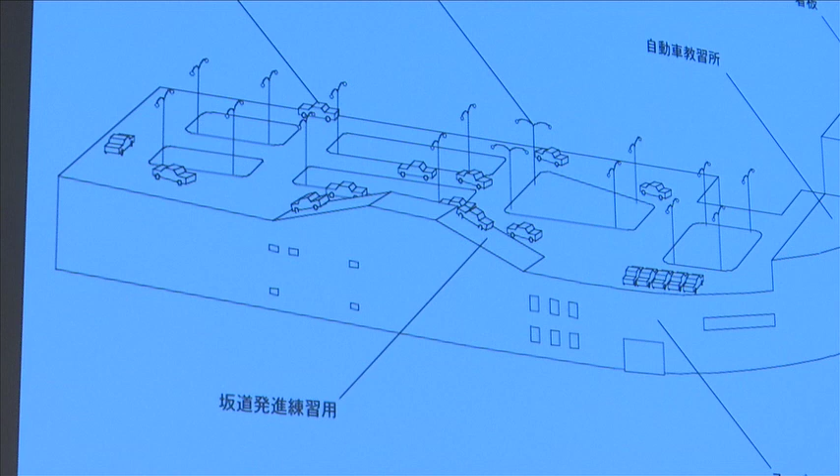So I'll go quickly. This is a super car school—a supermarket and car school on the rooftop of it. There's nothing to do with each other. This type of drawing was invented at that time—it's caricaturized, simple line, with certain depictions of important elements. We pick them out with these lines to explain small things, and how these create an ecology of different things in one physical entity as a building, which is strange and very surprising.

So the supermarket and the driver's car school—they have no business with each other, nothing to do with each other. But since in Tokyo the ground surface is quite precious, this kind of strange hybrid can happen. This is the department store—the highway department store.

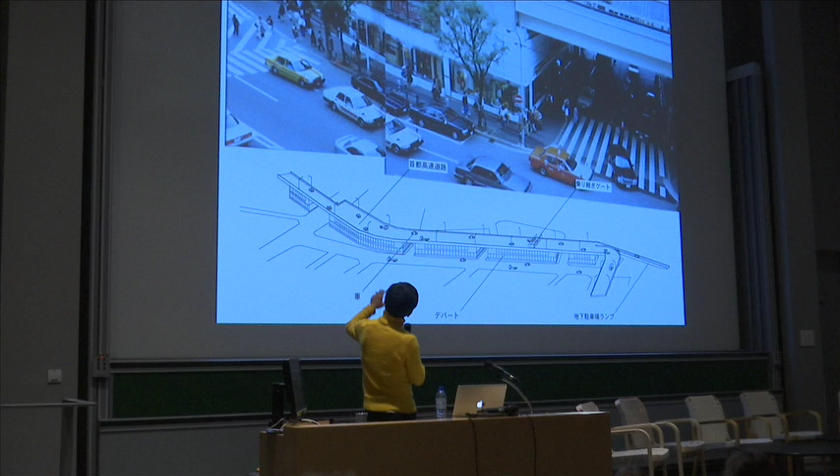It's the elevated highway running through Ginza. Ginza is the most distinctive, exclusive commercial area, like the Champs-Élysées, but we have a highway running through it. So in order to negotiate this commercial district with the highway structure, the ground level and first level under the highway—which is actually a byproduct of the construction of the highway—are occupied by shops and become a shopping mall. People on the sidewalk are walking 4 kilometers per hour, watching show windows, but on the roof, the car is driving at 100 kilometers per hour. So two different speeds are encountering in one building.

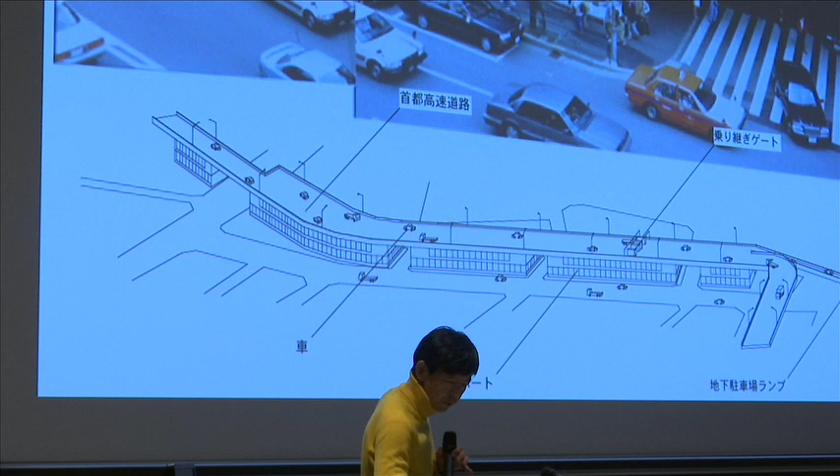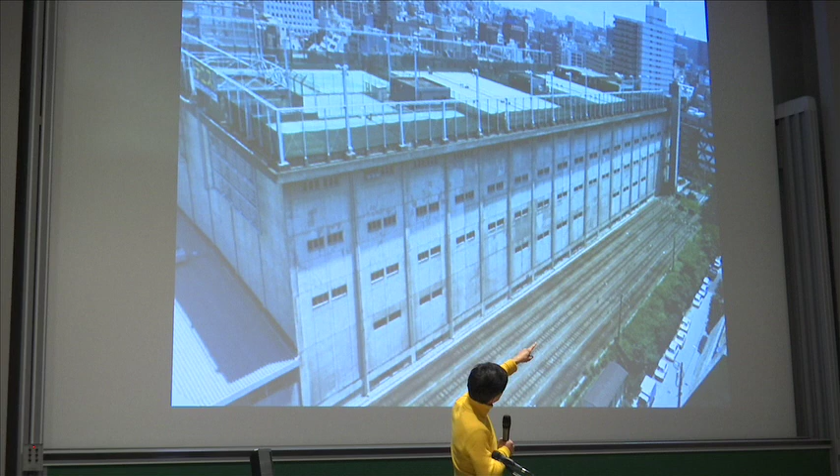Yes, it's a very silly drawing. This is a very simple building—a warehouse for paper without any attraction. On the rooftop, it produced a huge empty space, so the owner started a tennis court on top of it, adding a very tiny, small element connecting the ground level and the rooftop as the elevator. This elevator is the only access point to the rooftop for tennis.

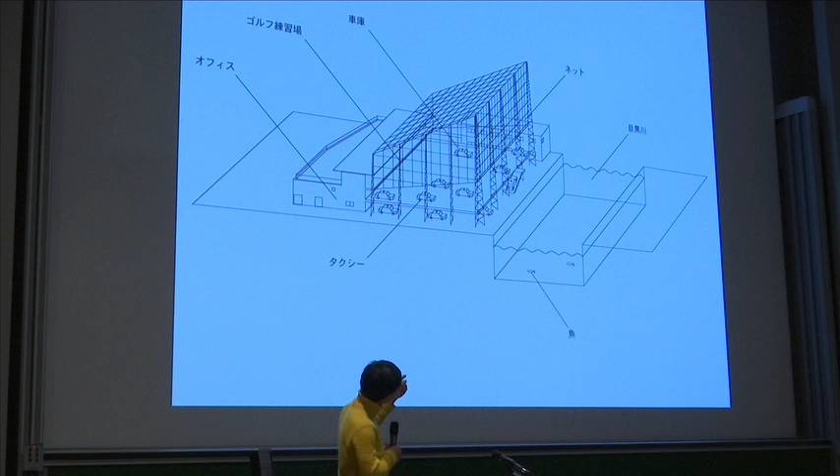Yes, this is destroyed now, so this document is quite meaningful. This is the golf taxi building. In Tokyo you can find this kind of envelope made of net for practicing golf, and this envelope always produces empty space underneath. In this case, a taxi company occupies that empty space for parking.

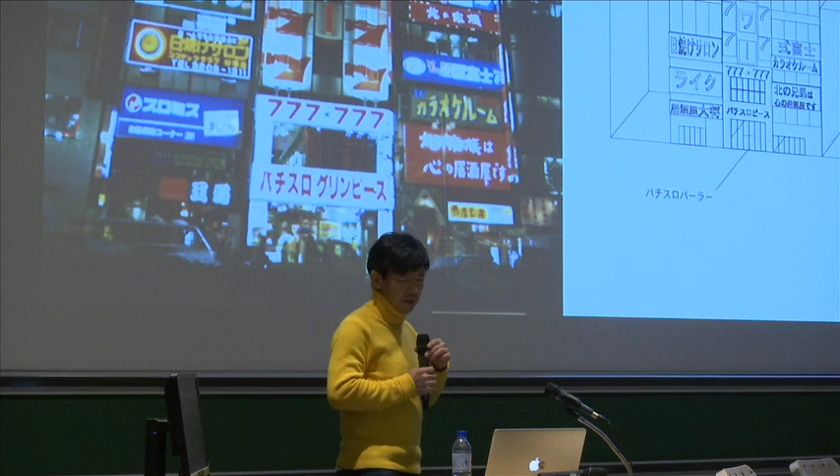You know Shark Bank, you can borrow money but with very high interest. Then you spend money here in the central building for gambling. So I imagine someone who has trouble with gambling goes to this shark bank to borrow money, spends money here, and then borrows money here again. So this dark side of urban ecology is also packaged in the form of Notre Dame. This is the kind of conclusion we drew from observing these buildings.

At first we tried to establish a typology of those hybrid buildings, but I realized it's impossible, because typology is achieved through a process of reduction - you try to find similarity between different cases, comparing them to find similarity within differences, and then establish typology. But those examples are all different, and there's another type of structure which produces this kind of variety and diversity. So I changed my mind, and realized it's better to describe it in this manner.

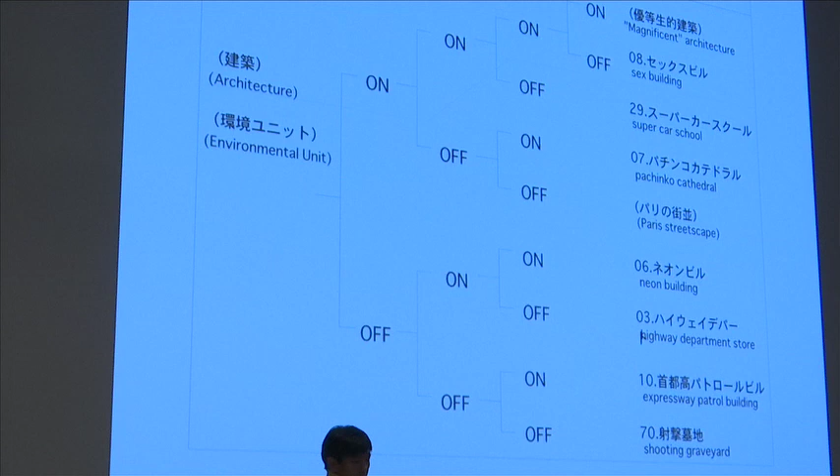There are 3 main orders for designing and planning architecture. The first is category - architecture is architecture, civil engineering is civil engineering. There are many examples which are a hybrid between architecture and civil engineering structure. But in the case of Made in Tokyo, this kind of category is dissolved, so it's off.

Structure-wise, modern architecture disciplines say that a building should have its own complete, autonomous, independent structure. But in many cases, they just borrow existing structures, and one function ends up bridging 2-3 different structures. So in this case, structure is also cancelled - structural order can be cancelled too.

So off is introduced, and then use-wise - for example, this department store, like a supermarket, has on its rooftop a driving school. It's almost a nonsense combination. So use-wise, we can also say there's no meaningful combination between different programs. So use can be off as well.

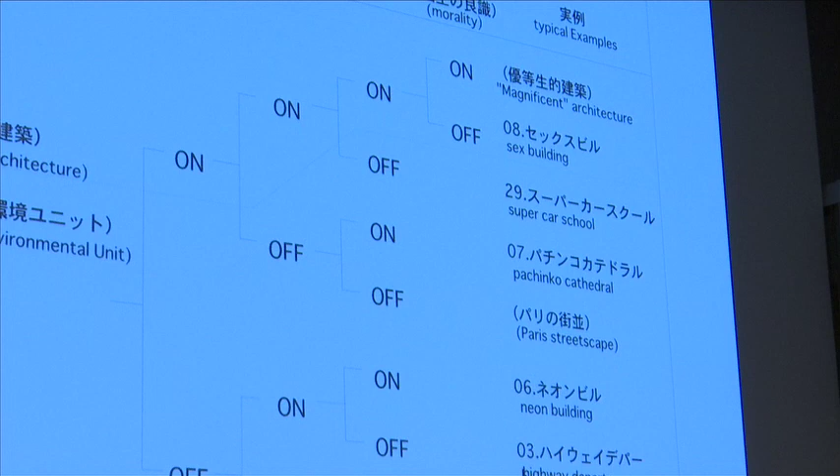If you only allow these to match with this kind of order, if you can only take one side, there's only one way to solve the problem. This is the canon of modern architecture, modernism in a very narrow sense - modernism is wonderful, I use it in a narrow sense here. But the examples of Made in Tokyo all introduce this 'off' moment of these orders, so 2 by 2 by 2, 8 different types, 8 different manners to solve the problem. This is a basic structure which can produce so many differences and diversify the space of Tokyo.

Now, the Pet Architecture Guidebook - more funny examples. This is Brasserie Rouen, a one-man brasserie, 1.2 meters wide and 8 meters long. There's no corridor space inside the restaurant, only a counter, and one chef does everything. In order to go to the bathroom, you have to go out from the restaurant.

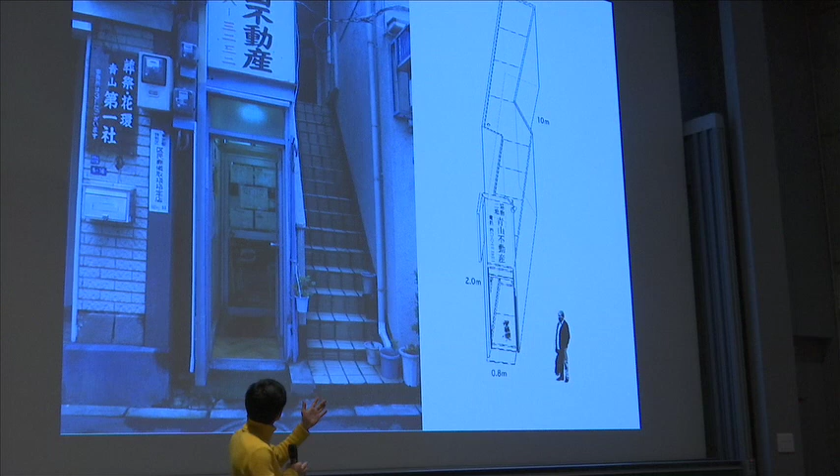This is Aoyama Real Estate Company, which sells information about real estate, apartments and empty houses. It starts from 80 centimeters and is 10 meters long. But this long wall works quite well to pin up information about apartments.

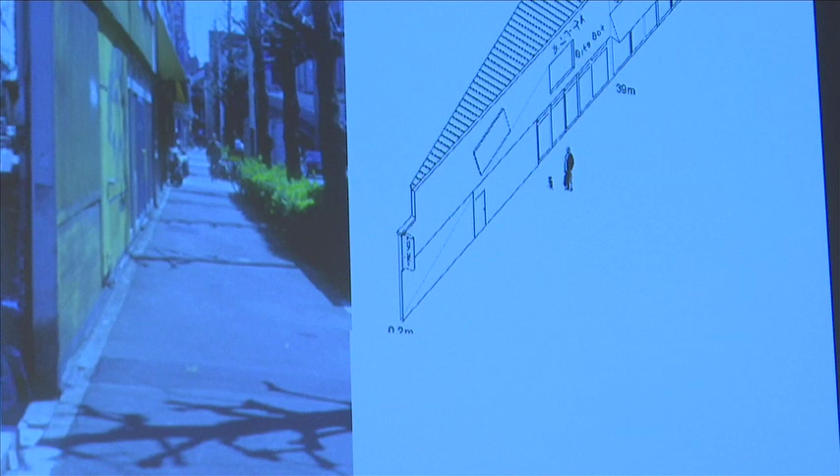This is Bike Box in Ikebukuro - an extremely keen triangle shape, run by a bike shop. He exhibits bikes from 50cc to 1200cc, small to large, according to the depth of the building. And this is a kind of mother-and-kid typology of pet architecture.

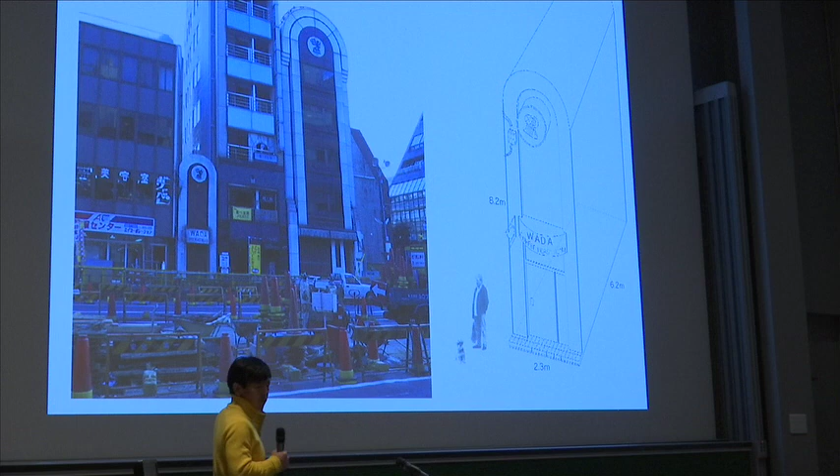This is a coffee shop - a cafe, with the upper level being the house of the owner. But since roasting makes a very strong smell, they made a roasting room separately, using the gap space between buildings as an independent facility.

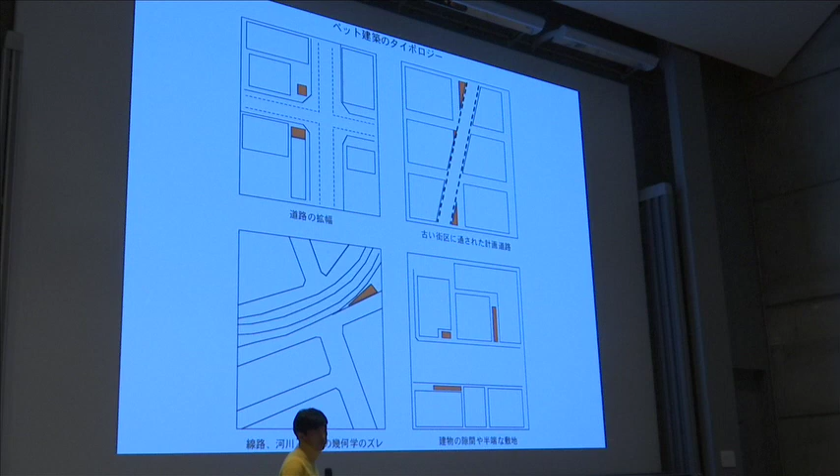And then, in the case of pet architecture, we can actually establish typology, because it's produced by the transformation of the city, street patterns, and urban fabric. So there are four main typologies.

One is produced by the enlargement of the street, and then the corner side becomes very small.

The second one is a kind of introduction of two different geometries, like this. The river and the railway track want to curve gently, but the street wants to be perpendicular. So there is always leftover space between the two geometries.

And then if a new big road is introduced, planned into the old city fabric, there is always this kind of leftover space along the main street, the new street.

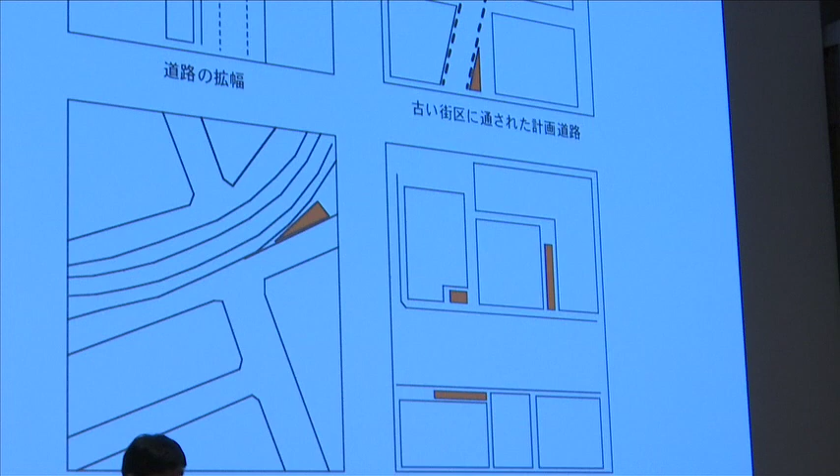And then in Japan, buildings don't share a wall with neighbors. We don't have a mur mitoyen. So there is a chance to insert a tiny little building between buildings.

So those four are the typology. Then I shift into another study called Void Metabolism, and it's about this nature of Tokyo's urban fabric.

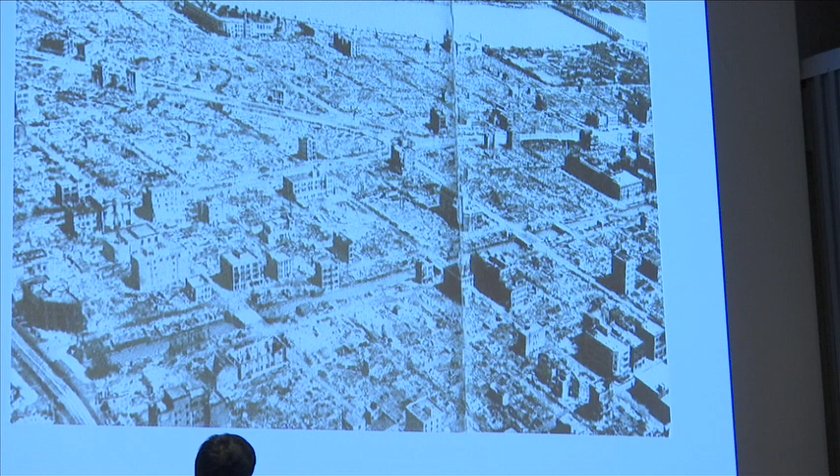So starting from this photo, it's Tokyo in 1945, just after the bombardment by Allied forces, and 70% of the surface of Tokyo was burnt out.

And then the Japanese government, during the post-war period until '52 when the San Francisco agreement was signed, was under the control of Allied forces, so we couldn't make a big urban plan, and we couldn't establish a new big budget for making fireproof concrete social housing.

So it's quite difficult to manage the reconstruction of the city. The only policy the Japanese government could pursue was asking people to build their own houses by themselves.

And then in order to encourage people, the Japanese government established a very low interest house mortgage plan, under the condition that the design should be done by an architect. So if the design was done by architects and signed by architects, this family could receive this very low interest house mortgage plan.

So this really encouraged architects to be involved in single family house design. This is why Japanese architects design so many houses—this strong tradition today was actually established through this process of recovery from World War II.

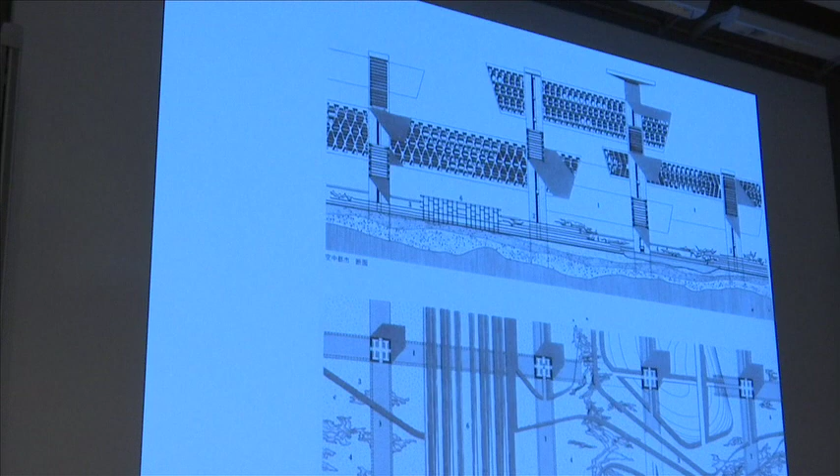So this core is called the urban core, designed to receive the accumulating population demographic flux from all over Japan into Tokyo, and then create a kind of city in the air. This is a very visionary plan by the Metabolists.

And then other younger architects like Kikutake, Maki, and Kurokawa all tried to propose the same model of core and capsules around it, though very few buildings were actually built. This is one of the most monumental buildings from that period.

Nakagin Capsule Tower still exists in Tokyo, which clearly shows how architects at that time imagined urban creation as a tunnel core which receives the flux of the population, and the replaceable capsule, which is a kind of tentative solution for people to live there. But actually, this building is now very deteriorated because the sewage pipe runs through the different capsules.

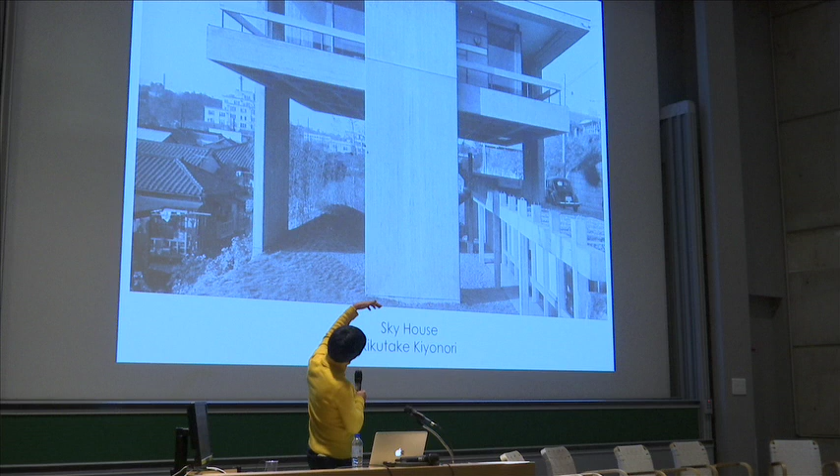So capsule is actually not replaceable. If you take one capsule, you destroy the connection of the sewage pipe. The same idea of metabolism was also introduced for this type of single-family house. This is Kikutake's own house, Sky House, dedicated for a young couple, he and his wife. The house has just one room, and the kids' space should be suspended from this artificial plane, which is supported by a concrete wall column.

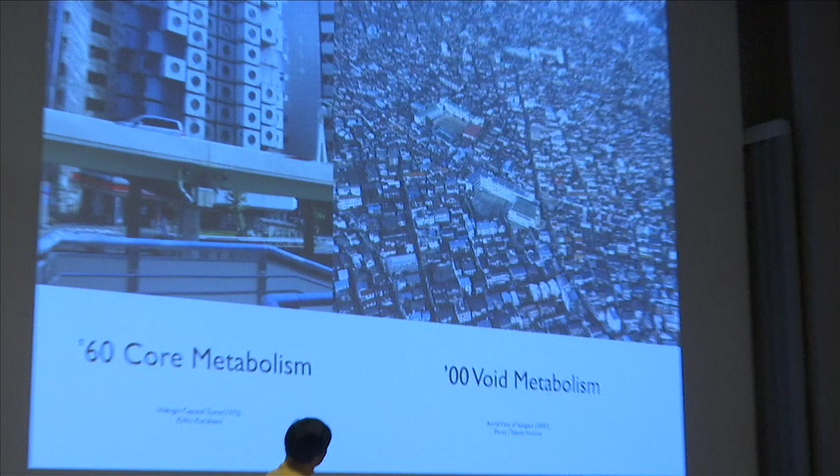And this also clearly shows the idea of metabolism. But actually, what was happening after World War II was this phenomena of repetition of houses over the ground of Tokyo. If this is also metabolism, because all these small grains of houses in the apartment are basically regenerated every 30 years, since the life average of a Tokyo house is 30 years.

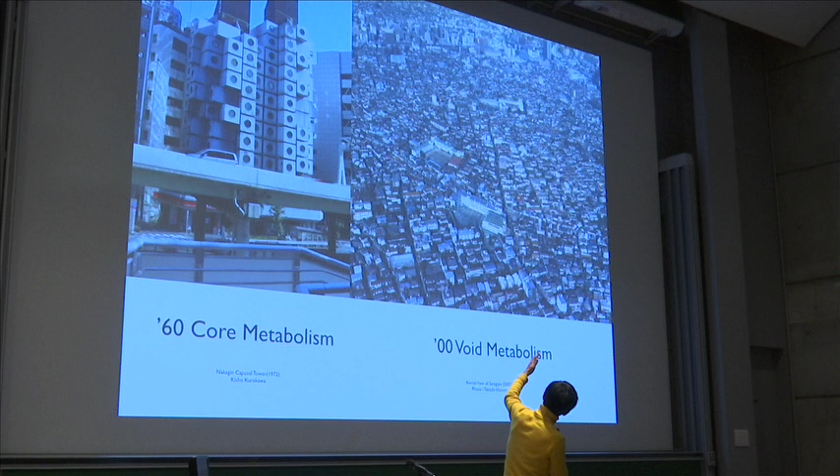But on keeping the void space between buildings, as I mentioned before, there is no idea of mur mitoyen, so there is always a gap between buildings, the void space between buildings. So void is always kept, but the building can be replaced. In this case, the actual void metabolism is a void metabolism, and the 60s metabolism can be considered as core metabolism.

This is a view from the Observatory of the Metropolitan Government, designed by Kenzo Tange in Shinjuku, towards the northwest direction, and you can see the repetition of houses until the foot of the mountain. And this is the actual urban fabric where people are living.

Within this nature of Tokyo, it's not easy to... this is a result of the recovery process from World War II, because the government asked people to build their own houses by themselves. Who can build? Who can start doing it? And within this urban fabric, there are many interesting phenomena.

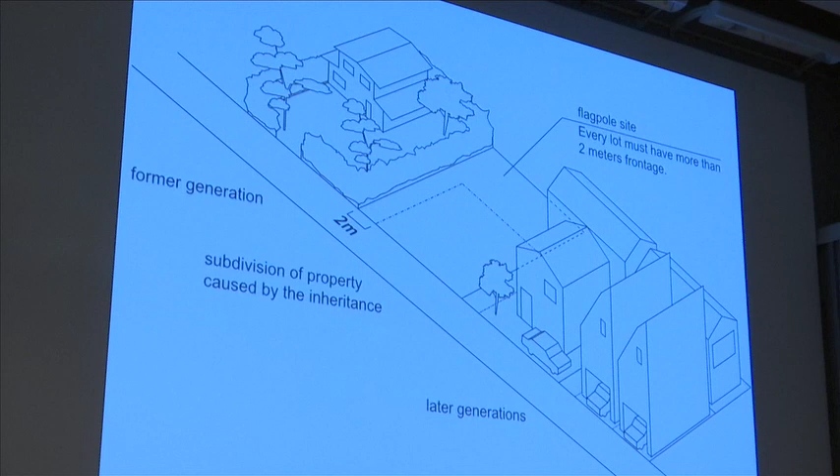One of those is called subdivision, I named it the subdivided suburban. I did a study on the first generation of Tokyo's Okusawa area, which is now swallowed into the urbanized area.

And then we can see many different generations of houses. This area started development in 1920, so it's already 99 years old, and the life average of the house is 30 years. So theoretically, this area has already experienced the regeneration of the building three times. From now on, all the new houses will be considered the 4th generation house. So why is this regeneration happening, and why is it so short?

One of the reasons is there's a very strong inheritance tax policy to redistribute the fortune from one rich family to others. So the inheritance tax is over 50%.

And then the price of land went up extremely high during the 1980s, during the bubble economy. So for example, 250 square meters, which is the initial size of the property of this first generation of suburban development, cost $3 million. And if you are a single child who inherits this property from your parents, you have to pay half the price of this. So you have to pay $1.5 million to receive the 250 square meter property. This is not affordable for a normal employee.

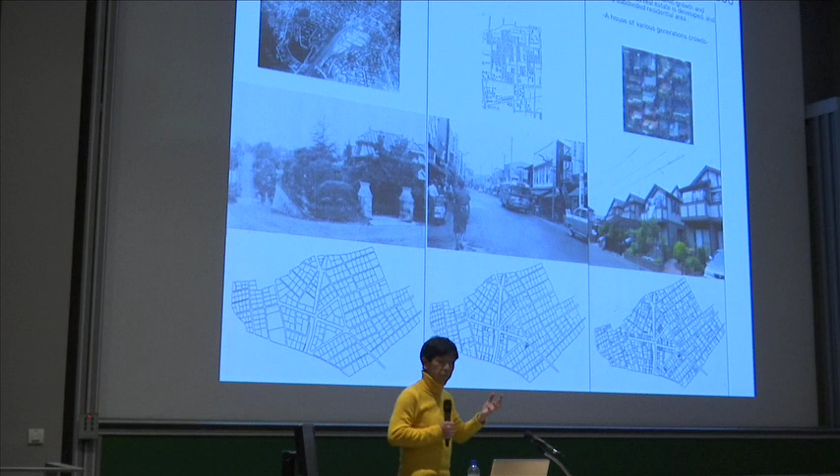So in many cases, they divide the property into small pieces and sell them to pay the tax. This is the kind of mechanism which subdivides the property into small pieces, and the result is like this. Because this is all up to the family, the regeneration is not organized by the municipality, so it's totally up to the individual families. This is how the property is subdivided into small pieces.

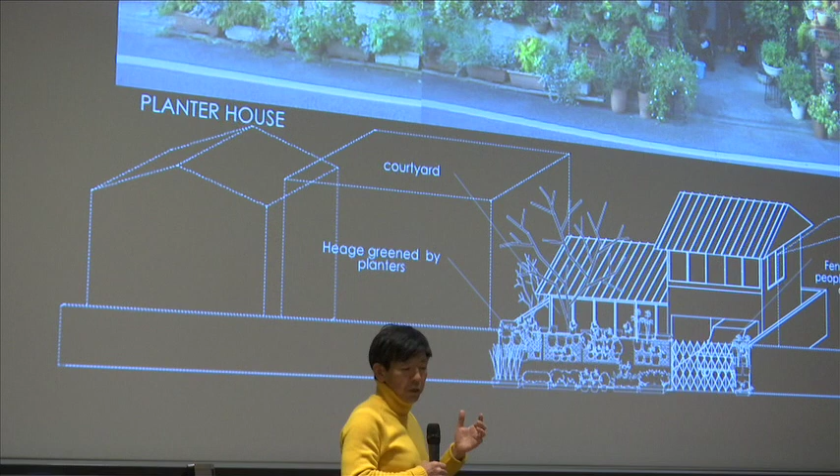Then we can still find the first generation, the original house, which was built in the 1920s, which has a very nice green hedge on the street side, with a big garden, but now the garden has too many grown trees, so the house is not seen so much. And then the second generation, the property became a little smaller, and from this generation people started to own cars, so the garage became an important element, but people still prefer to have greens to create a kind of barrier or buffer from the street.

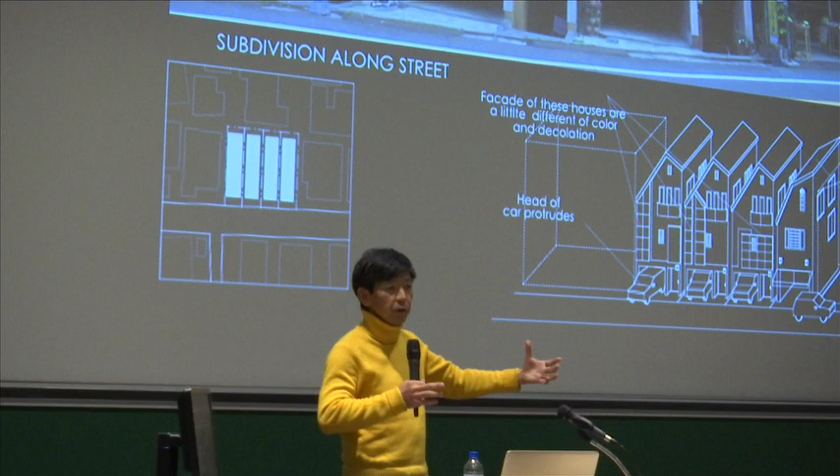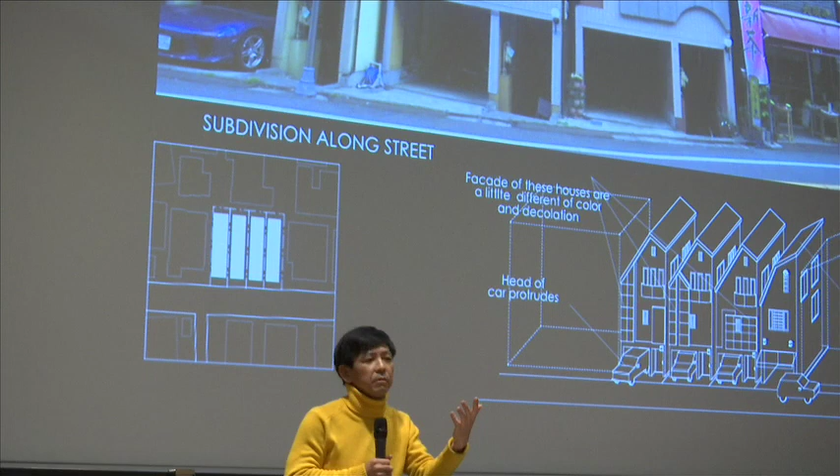But the third generation is like this: the developer bought this big property and divided it into four pieces, building this kind of decorated shed—flavor of lemon, flavor of orange, flavor of strawberry, flavor of chocolate. This is the history of transformation of the single-family detached house in Tokyo.

It's all happening in the same area, so that's why the urban landscape looks so disordered. There's no visual order, but it's because of this timing of regeneration.

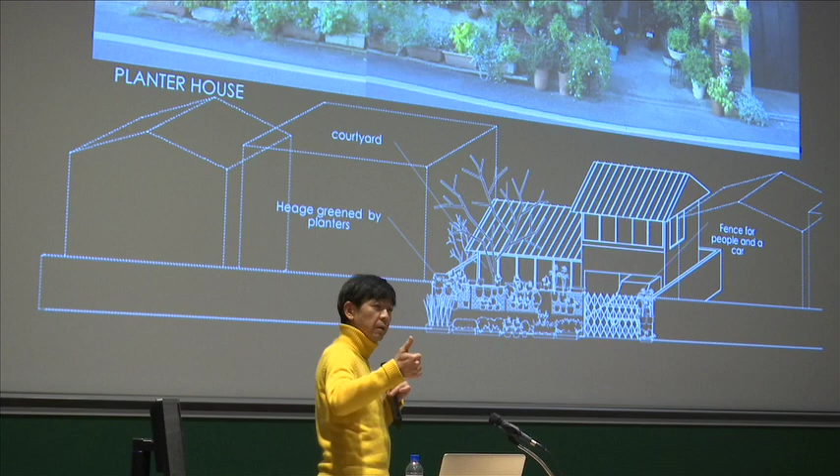In these 70, 90 years, Japanese society has been transformed so much. Construction materials have become very different, and the notion of family, the size of family, also becomes smaller—it becomes a nuclear family. The building law and building code have also changed. So each period, each generation really fixes these different conditions as a background for construction of the house.

So through those different generations, a single family house shows different conditions of society from different periods.

So how should we do as architects? Because we also work a lot on single family houses in Tokyo. In our generation, we are working on the 4th generation.

So I summarize some of the premises shared in the 20th century: the single family house was too pure for the family, too much interiorized by the production of a gap space.

So I tried to change these premises into a space with non-family members, with more opportunity to stay outside of the house, and redefine the gap space in order to produce a more tolerant, generous house.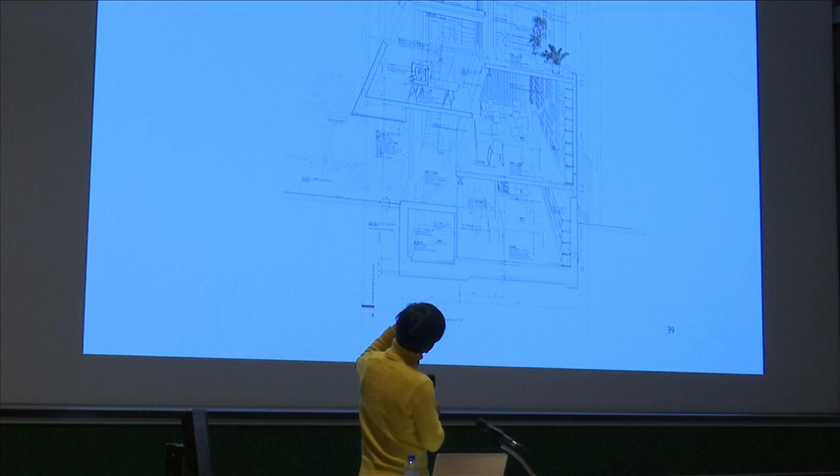This is another drawing I'd like to introduce: a section perspective. It contains detailed information—perspective information, surface information, the grains, and also the behavior of people. So many different things can be drawn before construction, and the behavior actually observed after construction.

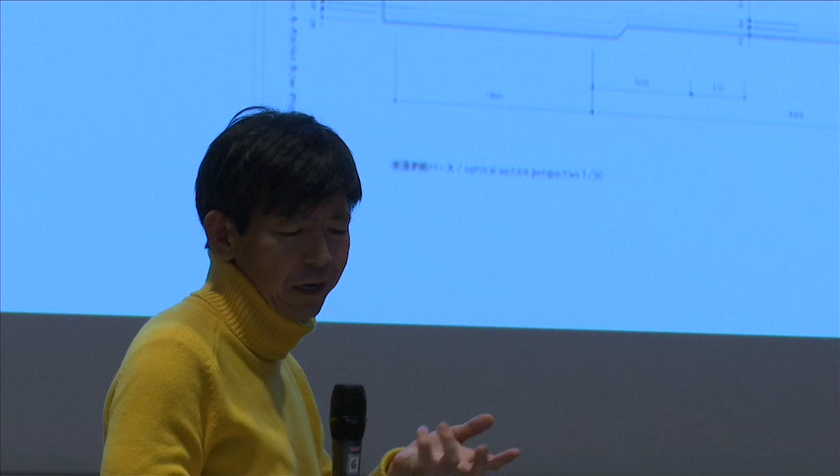So two different senses of time are overlaid in one drawing. We produce a lot of this type of drawing for each project, and the collection of those drawings is titled Graphic Anatomy—we've published two volumes until now.

This house has a working space at the bottom and living space on top, with a kind of mixing chamber in the middle between working and living. House and Atelier Bow-Wow is built in a very densely built environment, so it's hidden.

You can enter from the office—this is the only single door for the entrance to this building, so I have to pass through the office in order to go to bed.

The landing of the stair is much bigger than normal; in this case it's occupied by models. The living room is fully glazed, borrowing the neighbor's exterior wall as our wallpaper.

We also have this kind of northern balcony where we can enjoy lunch and dinner during good seasons, and try to bring all the gap space as part of our own space—this is a way to redefine the gap space.

But the most important part is this different sense of membership. A house was always designed specifically for one family, which is always very closed—membership-wise, the single family, nuclear family, is very closed. This house is designed with the premise that we have a semi-open membership as family, so our family and my staff use the same building, and the building is utilized for 24 hours.

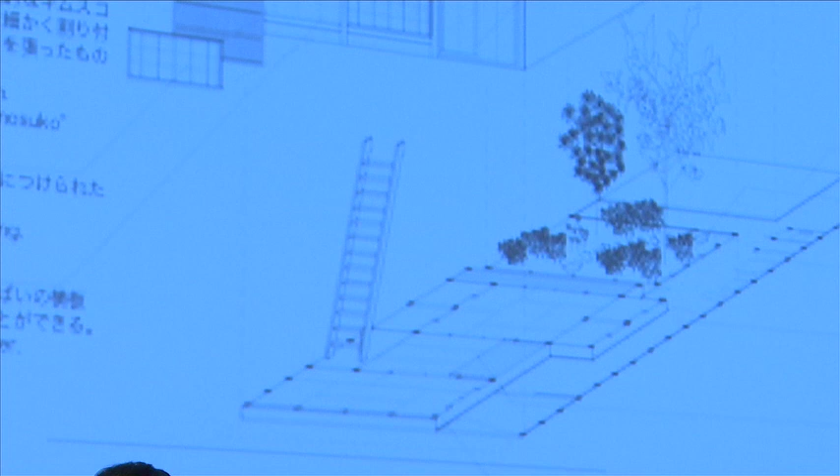I established five different principles of Machiya, like the five principles of modern architecture by Le Corbusier. This is one of the very beautiful streets which still has the very original condition of Machiya typology—very beautifully harmonized and coordinated. But actually, in the city of Kanazawa, this study was about Kanazawa.

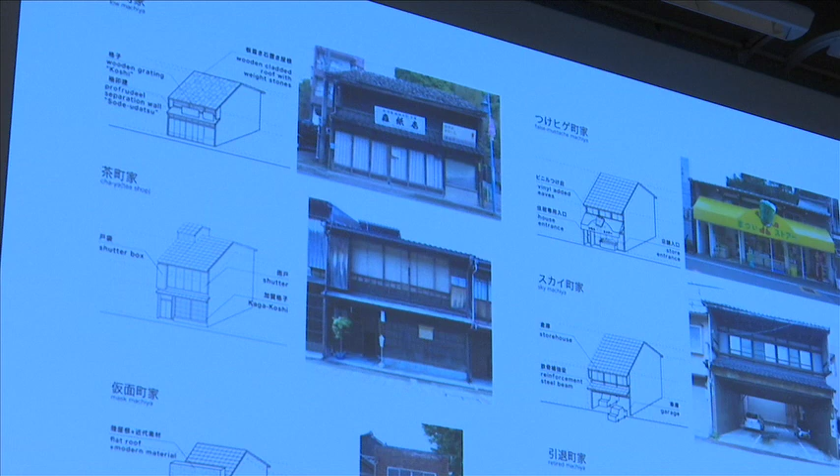There are many adaptations of old typology into quotidian conditions. From top to bottom, the top left one is the oldest case, Machiya in Kanazawa with a very low second story. The third one we call masked machiya—it has a brick tile facade in order to hide the old appearance of the machiya, because this was a barber shop.

The barber tried to be modern. For example, an added eave is a very important element added in the middle of the facade. In the top right one, the added eave is replaced by a plastic canopy in order to have more space for the store.

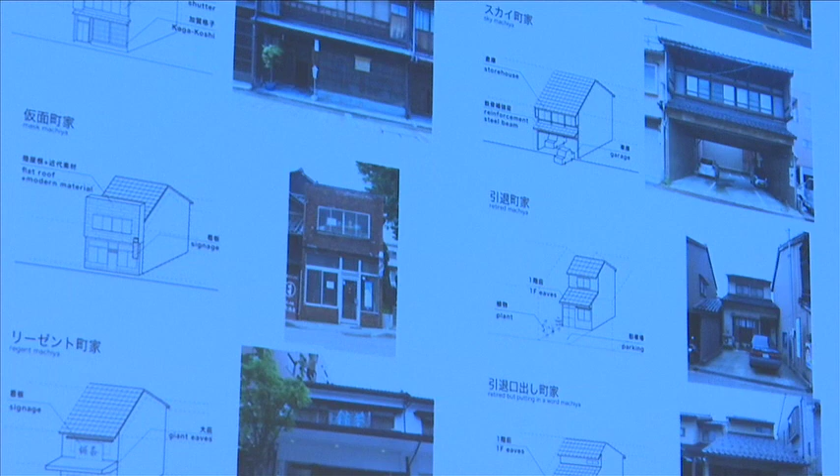Then sky machiya is kind of scraping the ground level for car parking—car parking is the biggest problem for machiya. People in the 20th century underestimate machiya because it was designed and established when cars didn't exist, so it's very difficult to find car parking.

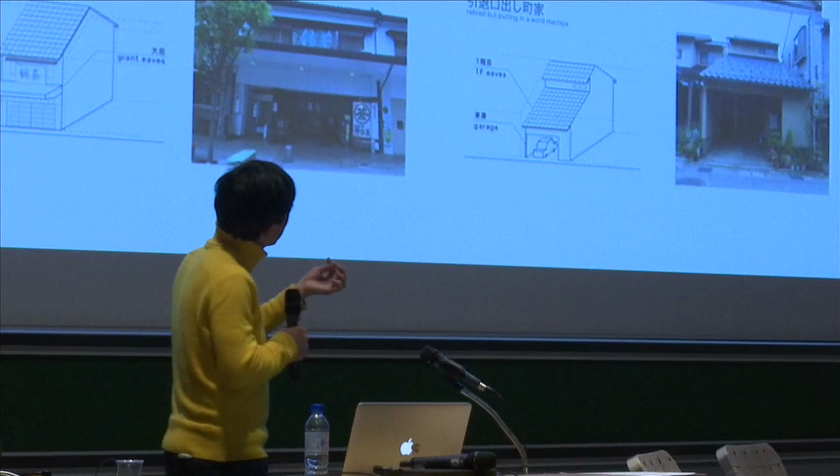It's long and narrow with several courtyards in the middle, so people found it cold and dark and preferred to make a modern house—so it's underestimated. This kind of modification happened, but actually it's quite lovely. I really like these adaptations by people, not by architects, because they express a strong affection and try to make a connection to their own typology of the city, machiya.

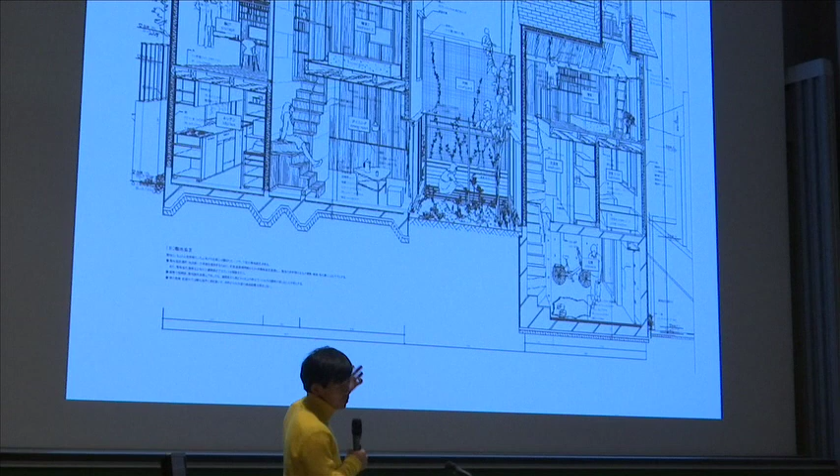This is also from graphic anatomy. There's a very interesting sight penetration from the front side to the back, deep side of the building in machiya, so I applied the same principle in this house. There are five sequential walls, but the position of the window on the upper level is always the same, so you can see through the house.

Like this. Another project, another type of graphic, is public drawing, and the first public drawing we've done is this—it's in order to calm down our soul after the big earthquake in Tohoku 2011.

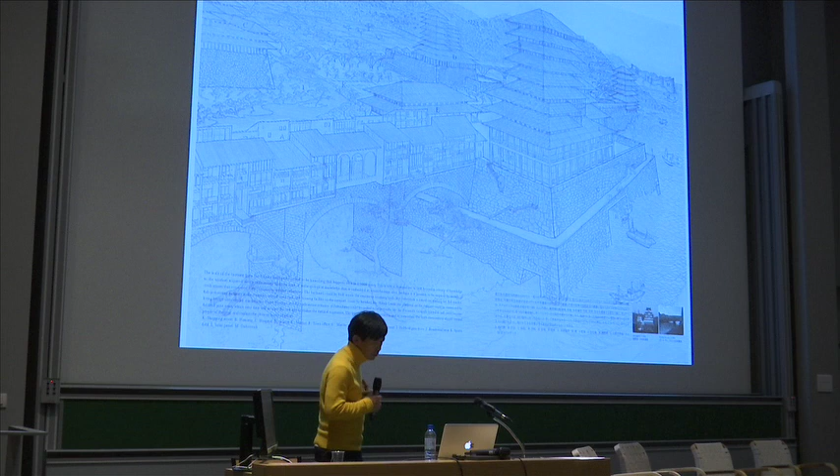My students and I were really nervous because we couldn't do anything for the people who experienced this devastation. We couldn't go there because the road was cut and gasoline was not enough even for the devastated area. So we couldn't go without having a strong purpose.

So we started to draw in order to calm down ourselves by imagining a new kind of city in this tsunami region, borrowing many different typologies from World Heritage Sites, because the size of the tsunami was said to occur once in 1,000 years—meaning modern architecture doesn't make sense. So I tried to apply fortress-type buildings or bridge-type buildings which have already lasted 300, 400 years on the planet, learning from them and applying their vocabulary and typology to reconstruct the tsunami area.

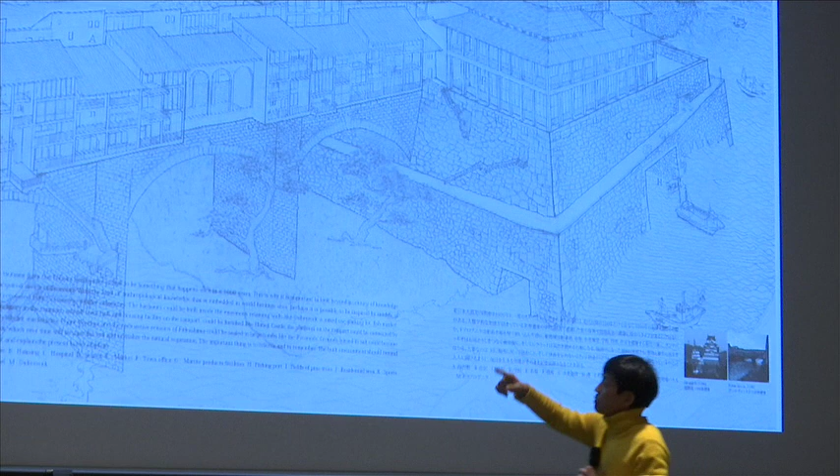It's not serious planning, but idea-wise I think it's quite interesting. Each small community has its own castle, and the roof is fully covered by photovoltaic panels which produce energy for them. These castles are connected by bridges, like the one in Firenze, Ponte Vecchio—a living bridge where the shopping street is integrated into the bridge.

So we drew by pencils and chatting. It was very nice to calm our soul.

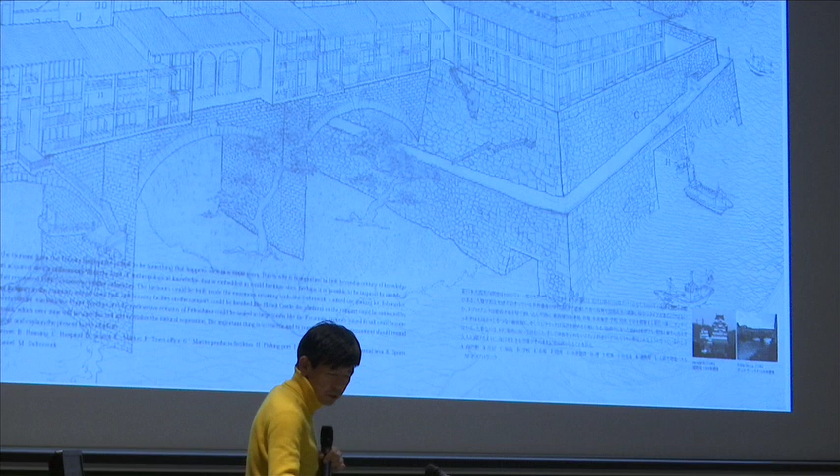And then we had a chance to exhibit these drawings in the modern art museum in Tokyo. The original one is the one above the monitor, and then we magnified these drawings 8 times bigger, but they're only drawn by pencils with 20 people together. So one person is taking care of just the waves on the sea, one is taking care of just the stones, one is taking care of the pine trees, one is taking care of the photovoltaic panels.

So it's like a kind of collective of different professions to make a city. We give different roles to different drawer people to work together. This is the idea of public drawings. In that sense, this drawing has no authorship, it's copyright free. By chance I discovered that from now on, I think architectural design can be based not on authorship but on membership. As I explained in the last volume's metabolism section, alternative membership becomes a very important idea.

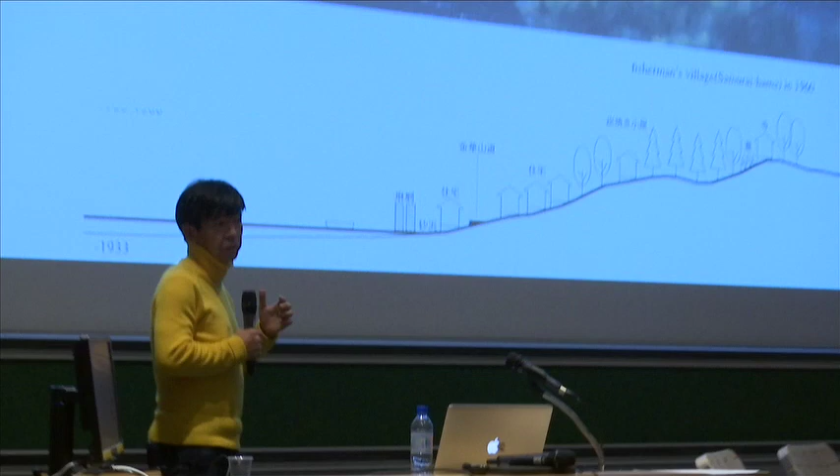This is a view from the 1960s. There's a mountain behind with cedar trees and bamboo forest. The big roof is a house for the old family who founded this village, and the small houses in front of the sea belong to a relatively newer family who came here. Other small sheds are working spaces or storage for the fishermen.

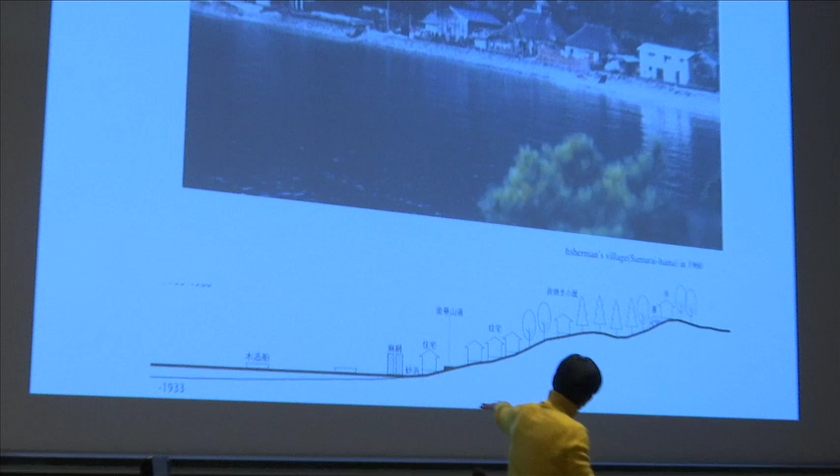And so we started to draw this kind of valley section, like Patrick Geddes. This valley section shows how the life of the fishermen connects the water, the ocean, and the mountains. They have graves and a temple on top of the mountain, and they plant cedar trees between the temple and the charcoal-burning shed, and broad-leaf trees for firewood.

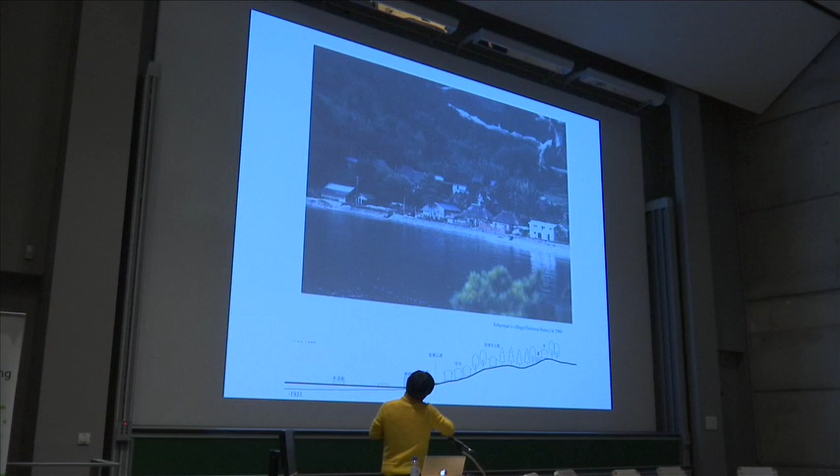They can also crop mushrooms and wild vegetables. They have houses, a street, a new family's street of houses, and working sheds and water. This valley section shows the network of things which produces, which exists behind this beautiful fisherman's village landscape.

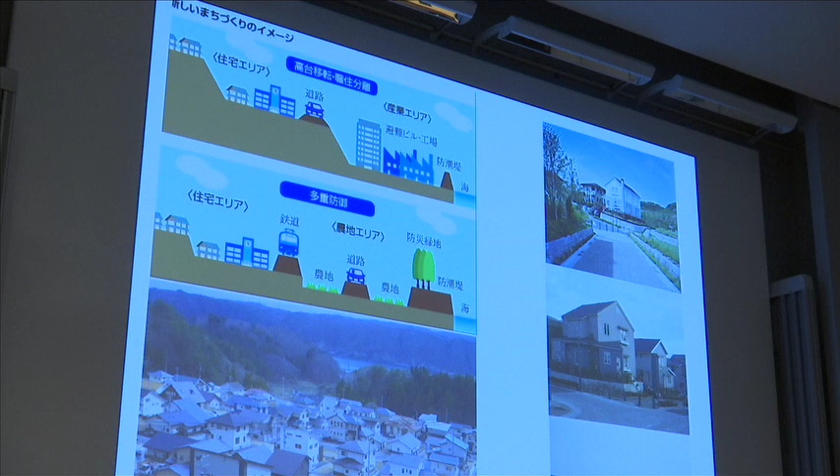But actually, what the government is proposing now is this kind of section—another valley section given by the government. There's a sea dike to stop another big tsunami which might happen in 100 years. In both cases, the lower level is prohibited for building houses, and the upper level of the village is dedicated for housing. But what is actually happening now? It's already occupied by new houses.

But all those houses are actually provided by big companies from Tokyo, Osaka, big cities. So industrialized houses, which is very different from this one. In this case, houses were built with local timbers and local carpenters.

So the construction network, the network behind the house, was totally regional and local. But now the network behind the house is replaced by the industrial network.

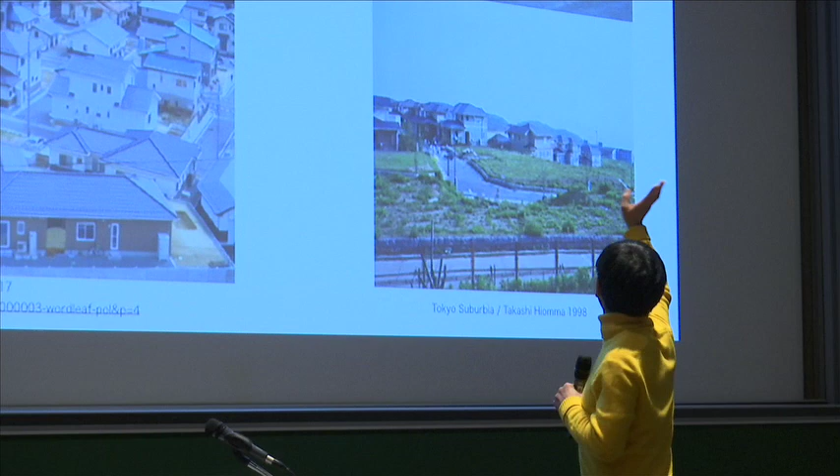I think this is really serious because it will probably become an identity crisis in 50 years, because this is a landscape of Tokyo suburbia. This is from the very famous book Tokyo Suburbia by Takashi Homma, photographer. It's a view of Tokyo suburbia, and then exactly the same with this Tohoku fisherman's village. I think it's really serious.

So the government says, okay, this is a recovery because we fulfill the number of houses, but actually by replacing the network behind it, locality was totally banned and killed and disappeared from the construction culture of this region.

So we are very much interested in following this kind of network behind things, behind objects. Very much inspired by Bruno Latour's actor network theory. And then we continue working for the Fisherman's Village.

Especially Momoyo, my partner, is now working as director of a fisherman's school in order to get newcomers, new blood, young people who want to start fishing. The fishermen decided to start the fisherman's school together with Momoyo, my partner, an architect. And then she runs the school.

She's also teaching at another university where I teach. So with her students, she organized a program. It's a school, but there's no institutional program, just a kind of intensive workshop of fisherman's life. So teachers are fishermen. They teach how to work with rope, how to fish from the boat, how to cook, etc.

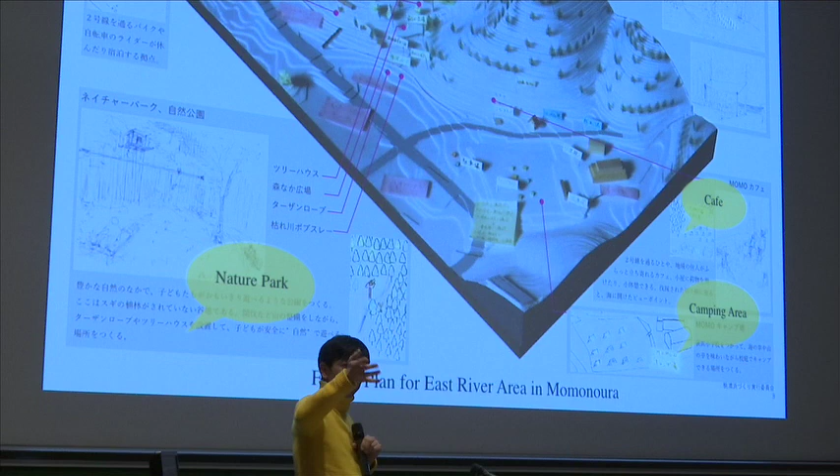We continued a series of fisherman schools, and realized this valley section connects water and mountain. One school version was about the mountain area, bringing fishermen to the mountain to teach how to manage, how to enjoy, how to play with the mountain. Momoyo did this valley section again to illustrate the connection between the mountainside and the water side. So this is a series of valley sections through time.

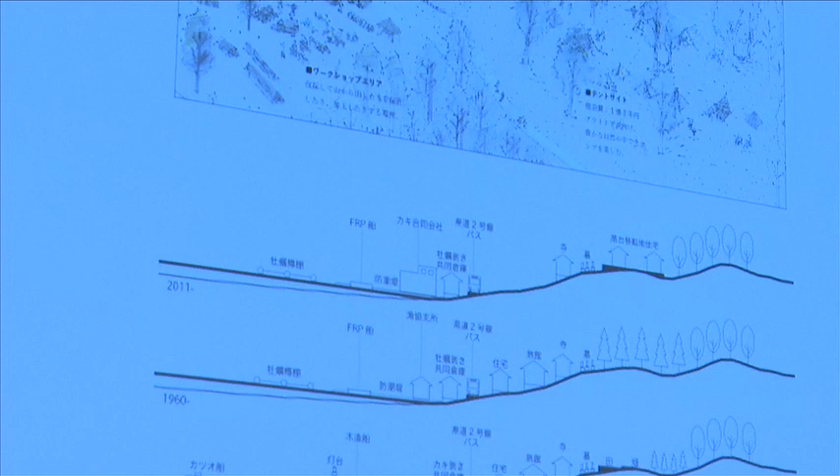For example, it's very interesting because this part, which used to be cedar forest, turned in the 1930s into rice farm and vegetable farm. It was the most populated period in this village.

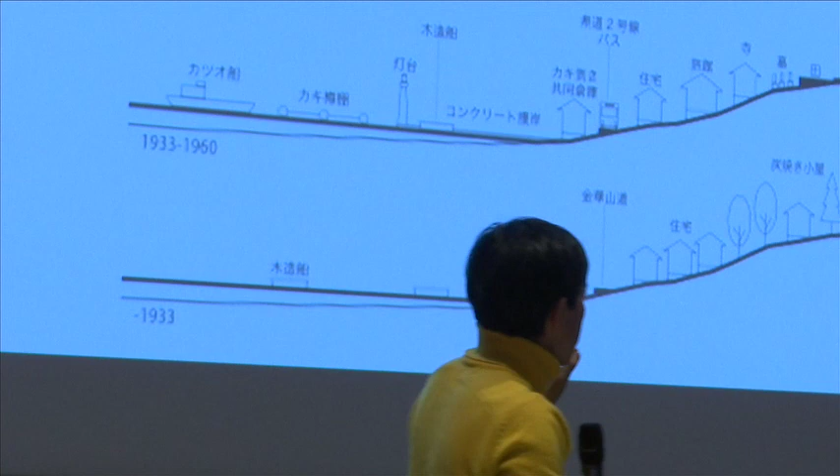And then from the 1960s, this farmland was transformed into cedar forest, because the government encouraged people to stop making rice and instead encouraged them to plant cedar trees to produce more timber for construction.

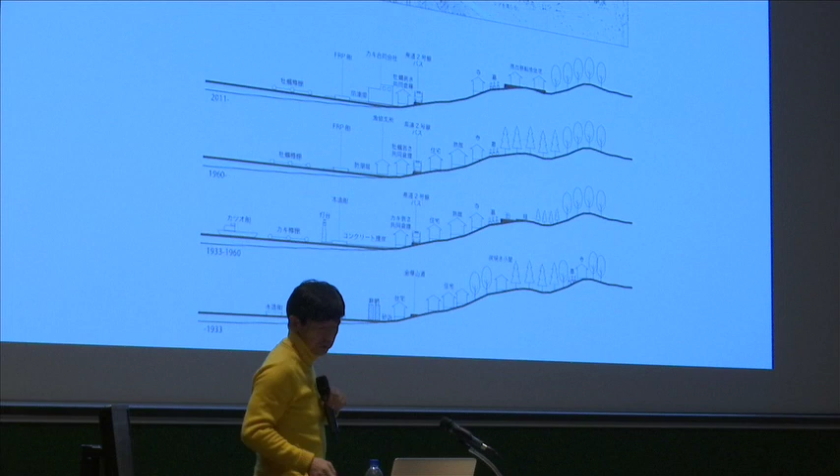Now in 2011, that area has been transformed into a new residential area. But this new residential area, the government only produced new sites for families who used to live in this village, so there's no place for people who newly come from outside the village to become new fishermen. So we are trying to solve this problem by cutting some forest to create a kind of open space.

And then it becomes a Momonoura village. Yes, we cut cedar trees and create open space, but this used to be farmland, so it's stepping up.

Yes, there are already stone walls which create terraces. So we worked together with young architects, and they designed this kind of small cottage, built together with students. It's also part of the fisherman's school.

And then we designed this main building. It's also a very cheap, sober building. And then we drew this again. Okay. You can actually stay here.

This is a kind of facility to learn the skills of how to fish, how to work in the mountain. So this kind of access to local resources is a program of this facility. So, professor, if you bring students to Tokyo, to Japan, please stay here. We can ask fishermen to bring you fishing from 4 or 5 o'clock in the morning.

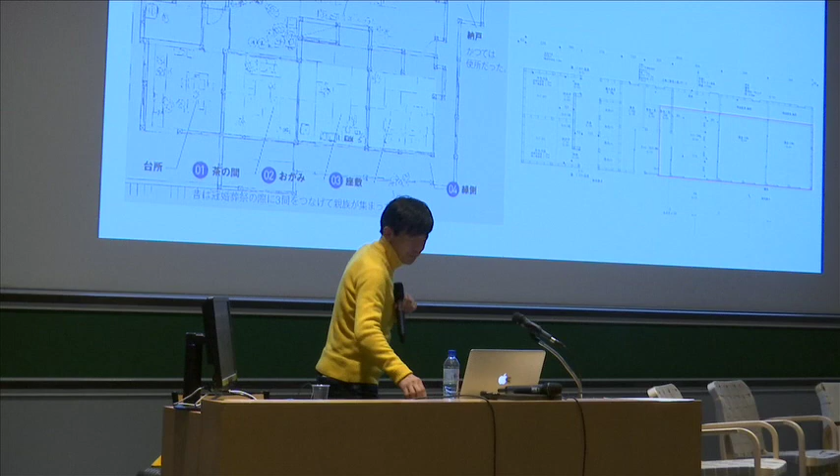So this main house is also a reinterpretation of a traditional fisherman's house. And this halfway broken stone wall is now refurbished as another program of the Momonoura village. So we do all these things by ourselves, learning from specialists.

And we also started the ancestor festival again during August. They stopped doing it for 40 years, but since the village becomes vibrant again, they want to start again. Yeah, we help to do it.

So with this kind of experience, our interest is very much in the farming area and mountain area. But before going to that, I have another project about this. Let's go back to the city. This is a book published in 2015 about commonalities, how architectural design can be based on commonalities rather than individuality and authorship. One of the chapters investigates how public open space in cities in different countries is appropriated by the behavior of people.

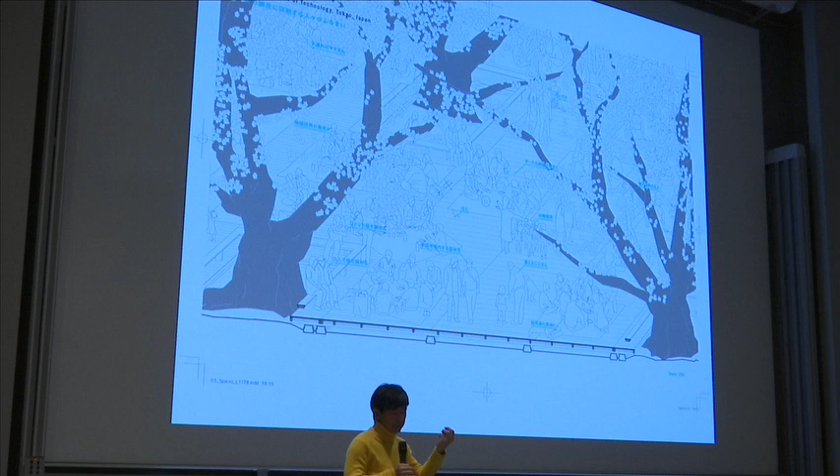So this drawing is actually not about the space, the physical composition of the space, but it shows the ecology of different things. It's another way to describe the network of things.

This kind of investigation can be applied to the project, like the Canal Swimmers Club in 2015 in Bruges. We were invited, and we also drew like this. It's a kind of tentative facility floating on the canal to encourage people to jump into the water, which was prohibited for 40 years because of pollution. Until 1976, people enjoyed swimming in the city canal, but from 1977 the city prohibited it because of pollution. But now water quality has improved.

At the time of this art triennale, the Bruges Triennale, the city wants to start again encouraging people to swim in the canal, because the city is fully occupied by tourists. They have 100,000 inhabitants as citizens, and they receive 5 million tourists every year. So the public space, the main square, is fully occupied by tourists, and cafes become very expensive. The citizens living in Bruges feel a little bit suffocated because they lost their own public space.

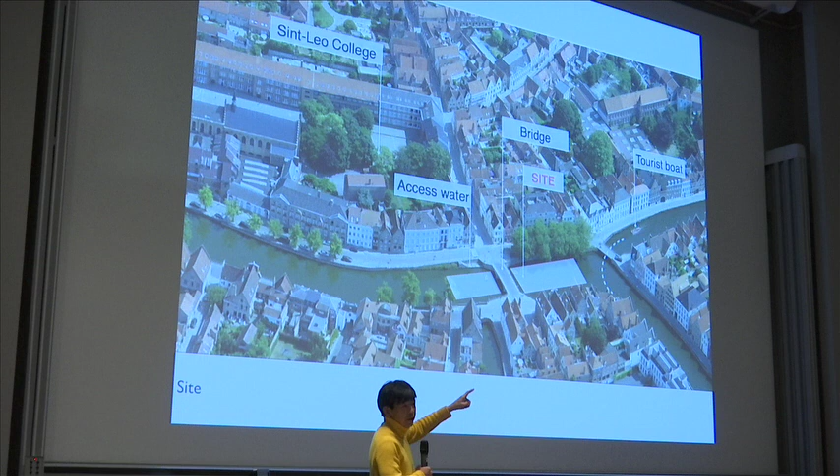So this water surface is a kind of potential public space for the people. But there is a barrier, a mind barrier, among people, because for a long time it was prohibited to swim. So if you swim alone, you are recognized as a crazy person swimming in the canal, which is dirty, but actually water quality is good. If 100 people swim together, people recognize that this is part of the culture of Bruges.

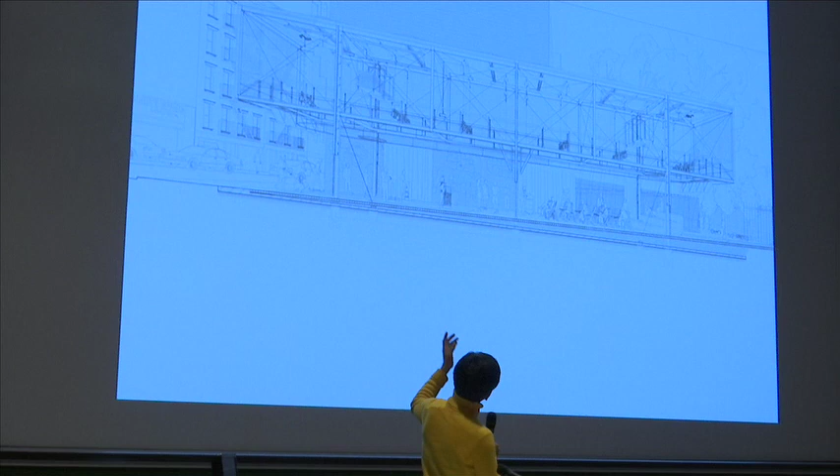So this is drawings of BMW Guggenheim in New York. Through public drawings, the same project can be illustrated in the manner of graphic anatomy, section perspective. This is not actually a section - it's a section with details and spatial quality.

I don't have time, but maybe I can give two more examples. Another graphic expression has been developed through the window study.

Window behaviorology is a 10 year long study in my laboratory at Tokyo Tech. We travel a lot to collect different types of windows, and we always sketch, measure, and take photos from inside and outside, and interview the inhabitants, and make this kind of drawings with measurements, always putting the title as a concept of the window.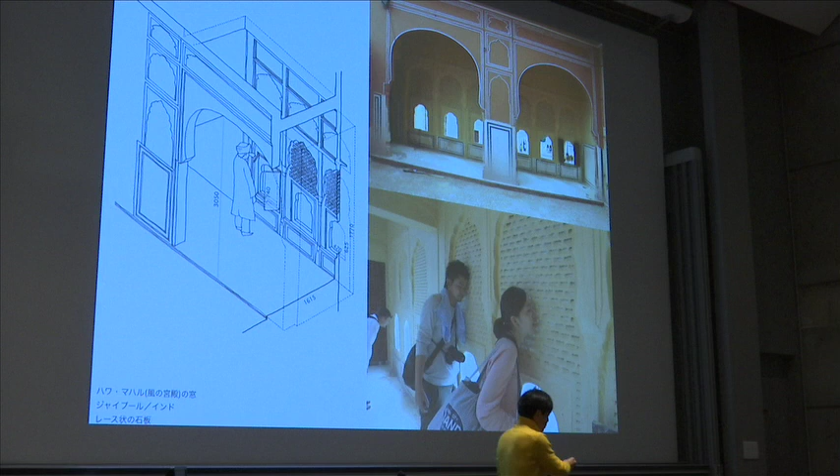And then this is from Jaipur in India, from Hawa Mahal, the Palace of Wind. A 7 centimeter thick stone wall carved in this way produces micro shadow within it, and produces a kind of micro climate within this 7 centimeters. It's amazing - this stone screen produces breeze while cutting the radiation from outside.

And it's also repeated - windows also have their own behavior as a collective. This idea can be applied in the housing project in Paris, Rue Rebière. This is a graphic I found on the internet about the Parisian apartment building, and I really like it because of this repetition of a French window, which is very redundant.

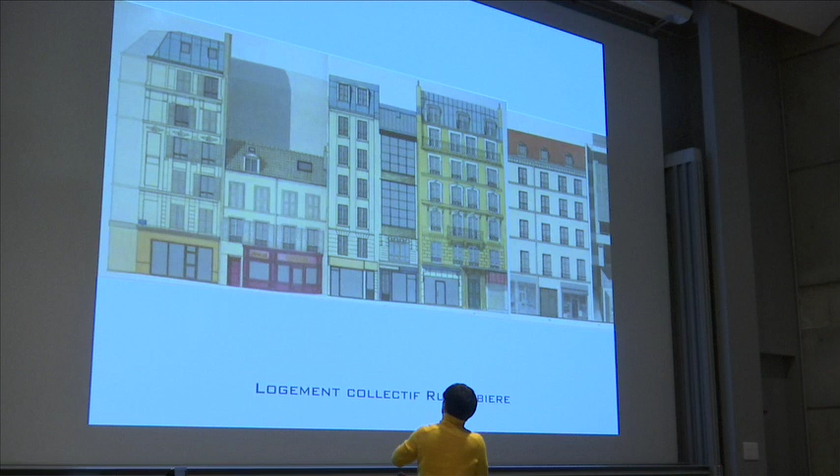We can say, I'm living in this window. But we can also say, I'm living with these 3 windows on the same level. We can also say, I'm living with 4 windows on two different levels. And we can also say, I'm living with this studio window with a more conventional window next to it. So I think behind this repetition of French windows, any kind of information is possible.

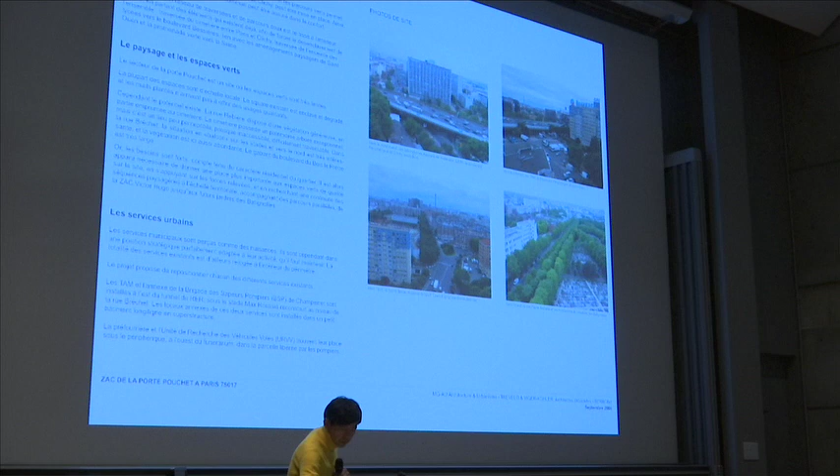And then this is a project, Porte Pouchet. 140 housing units built in the 1960s were destroyed, and then they tried to find a new place in the neighborhood with the same amount of housing, a little bit plus alpha. This blue tower is renovated by Lacaton Vassal.

So this is the site, the original site, just next to the Cimetière de Batignolles.

But here, we don't know how many families are living in this building, because there is only repetition of windows. I think it's more interesting.

So we designed the house like this. The central part is just a stacking of 2 bedrooms, 3 bedrooms, and 4 bedrooms, creating a kind of open space against the neighbor's property. And then this is a place where we can insert a single family, almost a small detached house, along the street of housing of Paris Habitat.

So this is a plan. This house has 6 windows, and this small house has also 6 windows. This 2-bedroom has 5 windows. And in total, this central building has 18 housing units with 108 windows.

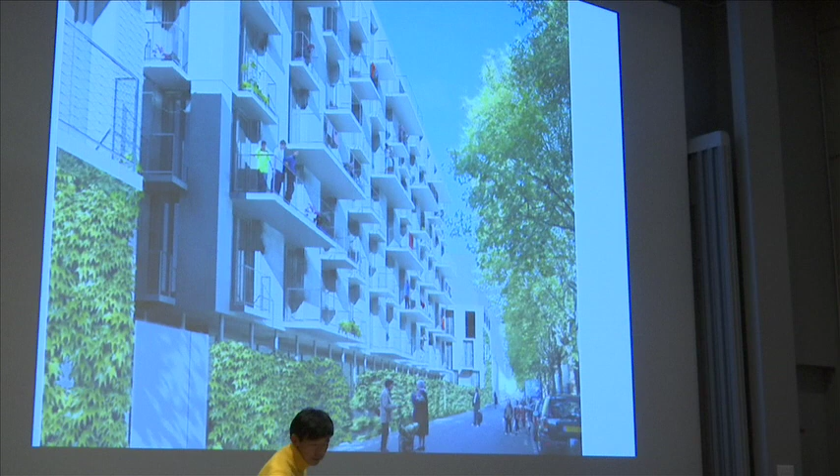But we don't know where the family unit is, because we also mystify the family unit by giving different sizes and proportions to the balconies, in a random disposition.

So this is a kind of result, before it was occupied by the inhabitants. Now with all these balconies, we imagine this kind of vertical neighborhood, a kind of communicative facade between different house units.

Nowadays, those balconies are pretty occupied by flowers, because there is one old lady who is very good at raising and keeping flowers. So she was invited by many different house units to make the flower garden in the balcony.

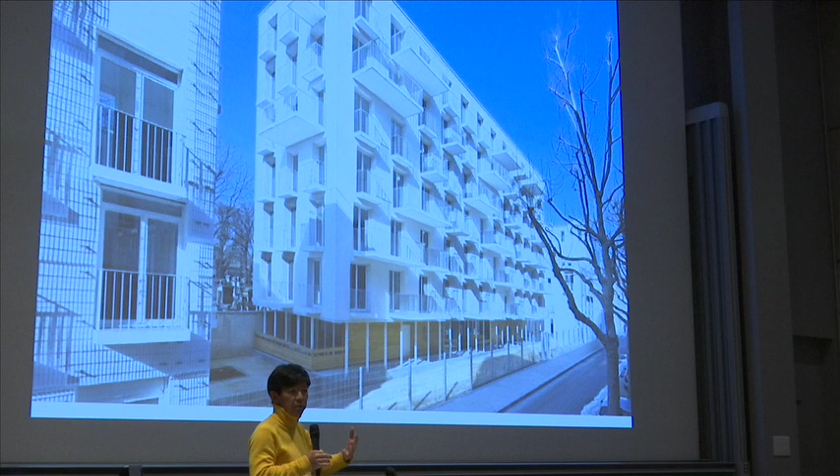Yes. Okay, let's go.

This is a building we designed. All the openings are covered by this metal screen, but with a random disposition, which is something different from the traditional one.

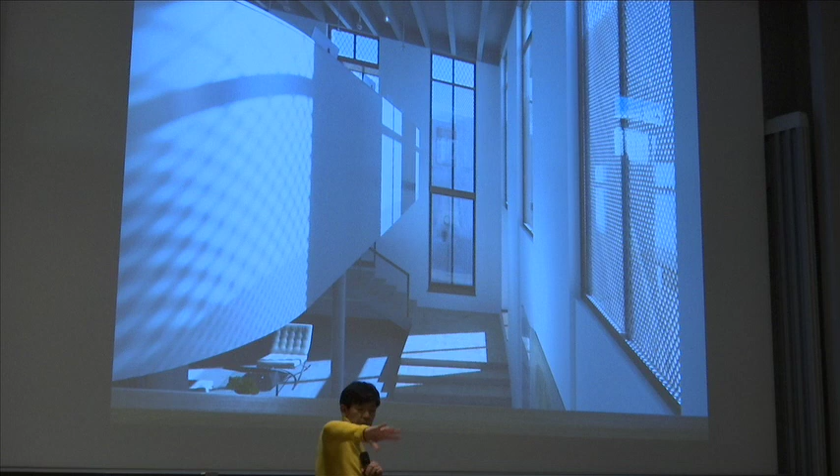So why is it stepping up? Because behind the wall facade, there is a staircase going up, and the landing is a place for reading books. The exterior wall is fully for the traditional physical books.

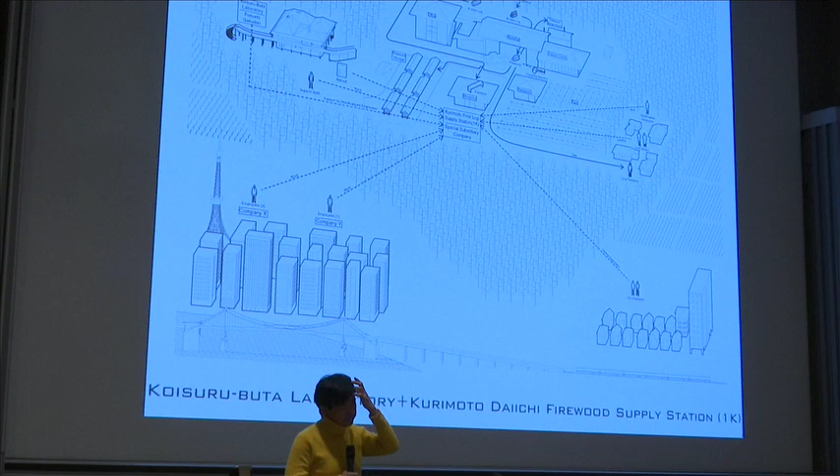So we are trying to show our interest in actor network by drawing, but it's very difficult, quite difficult to draw an actor network. But this is one of the better ones, which explains Koisuru-buta laboratory plus Kurimoto Daiichi firewood supply station. Probably you don't understand anything.

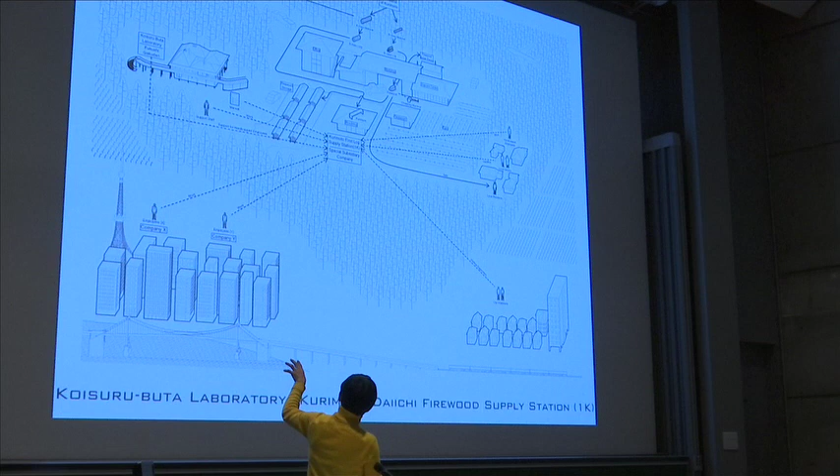It's a project to produce jobs for disabled people in the farming area, utilizing the unmanaged cedar trees in the region, connecting different actors from the big company, the urban residents, the farmers, and also woods and forest workers, and the sawmill in the area.

The area is like this. At the lower level, there are many valleys running into the landscape, utilized for rice paddies. On top of the hill, there is another type of farm for vegetables. Between the two, there is a slope covered by cedar trees, which was planted in the 1960s, as I explained.

The first project is Koisuru-buta laboratory. Koisuru-buta means 'pork in love' — strange name, but it's a brand name of the pork. This NGO runs a social welfare program like a daycare center and elderly homes, and the chairman of this NGO actually runs a pork farm.

But he didn't utilize this. He just produced pork, pigs, and didn't process the meat into a product like ham and sausage. So he decided to utilize this pork for producing jobs for disabled people.

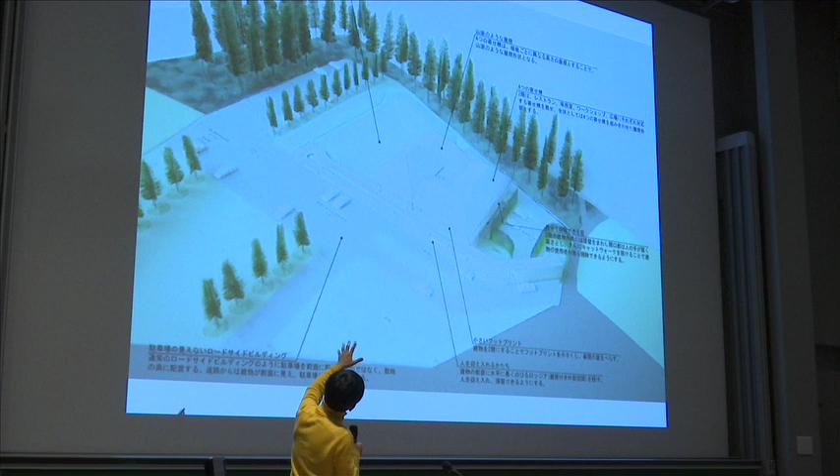So this is the first time urban citizens and farming culture encounter, and they need a certain typology to convince them to stay in the farming area. So Palladio introduced the Greek style temple for designing the house for the aristocrat or the merchant from Venice. I think this program is also an urban-rural exchange program, trying to attract people from the city to spend some time here and support the life of disabled people living in this farming region. I think it fits very well, this villa typology, because villa typology belongs to farming culture rather than traffic culture. The upper one is a road station, which is very popular now, but it always appears like an invasion of farming culture by car culture, mobilization.

So we try to set the parking as hidden as possible, behind the mound, which is produced by the excavation of the foundation, and keep the landscape open in front of the building. And it looks like this, yeah, okay.

So the upper level is a shabu shabu restaurant of pork. Downstairs is a factory for ham and sausage, subdivided into small rooms. So people with mental disease sometimes perform very well in a very concentrated condition, so this kind of factory works quite well.

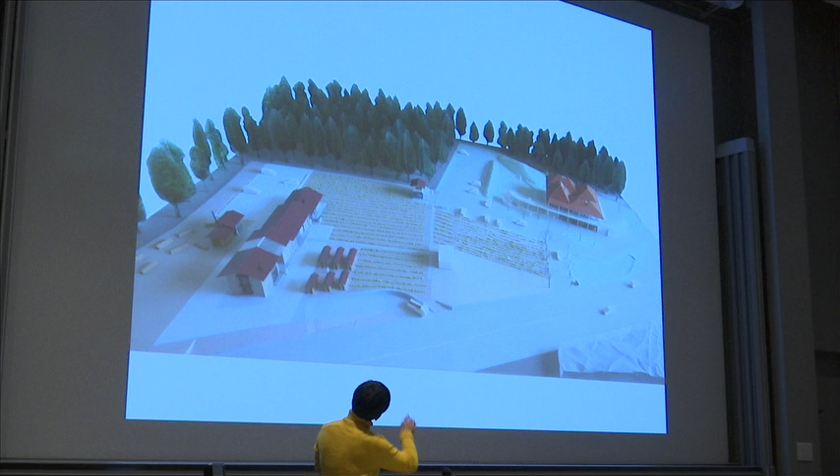The design of the building should be strongly related to the local timbers, because this facility is meant to create better accessibility to local resources. So we insist on using this trunk as a column of the building, and actually all the building materials came from the adjacent forest. The right one is the Koisuru-buta laboratory, a ham and sausage factory, and the new one, the firewood factory, is this one.

Yes, so you see this, all the main columns are this round log column. We also designed the roof to make use of the local cedar tree as part of this project. Most of the time, cedar tree is not strong enough for constructing the roof, so in many cases imported timber like American pine is utilized for roof construction. But in this case, we designed this roof structure carefully to invite local cedar trees as a member of this building.

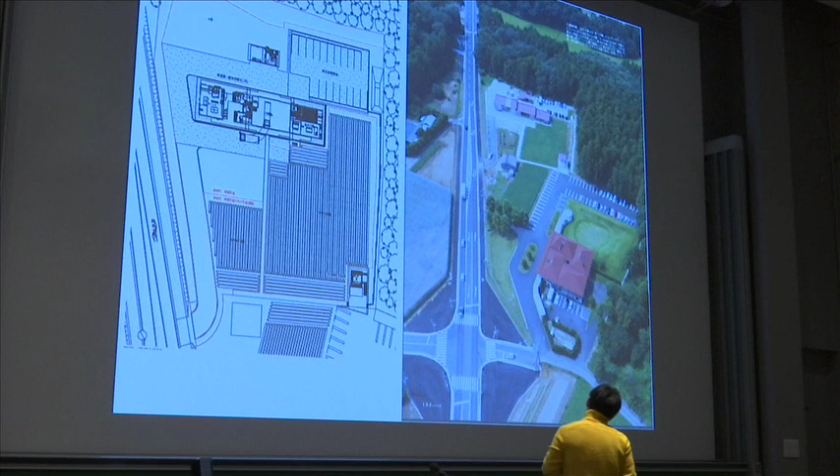So this is a view from above. This farm between the buildings is a sweet potato farm. It's also utilized as a care farm, so disabled people can also work here. So the building is like this.

In the first building, Koisuru-buta, we apply the typology of a villa. In this case, we apply the barn typology and storage building typology for the farmhouse. So now we can see a very mixed membership, with people from the city and people from the regions sharing the same moment on this campus.